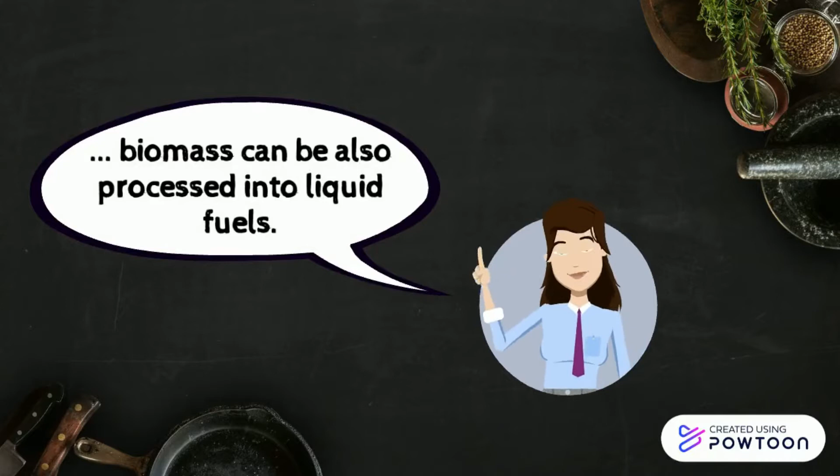Actually, biomass can be used as a direct substitute for fossil fuel, and biomass can also be processed into liquid fuels such as oil and alcohol. Besides, biogas generated at dumping sites and during the fermentation process of various organic sludge can also be used as an energy source.

In this study, researchers highlighted that the sludge from municipal sewage treatment plants can be a substitute fuel, in which, by utilizing this waste, compost may be produced and processed into valuable fuel, such as briquettes. Briquettes have the same weight as brown coal, and combustion of briquettes can even be achieved with lower air pollution.

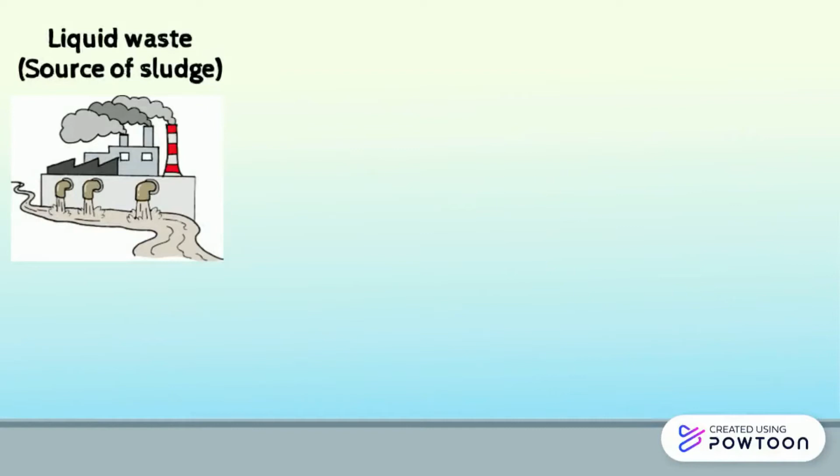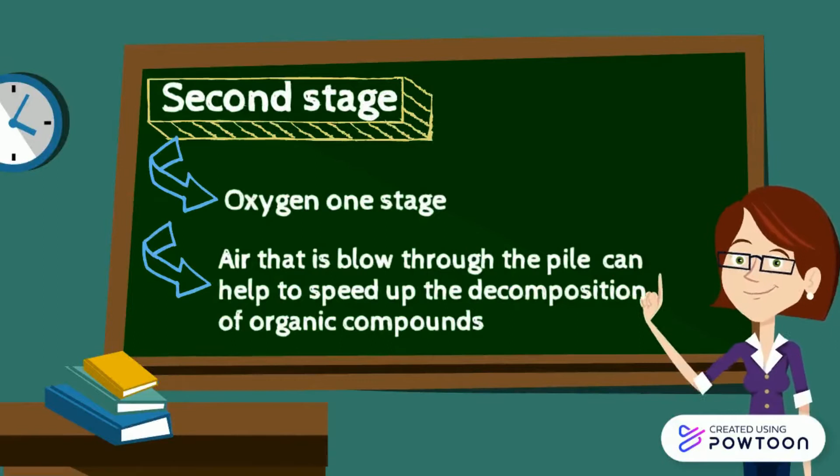The second stage is the oxygen stage. The air blown through the pile helps to speed up organic compound decomposition. The third stage is the briquetting process. Briquetting is the granulation and addition of artificial additives to obtain some kind of fertilizer. The end product is a substitute fuel with a calorific value of over 10 megajoules per kilogram.

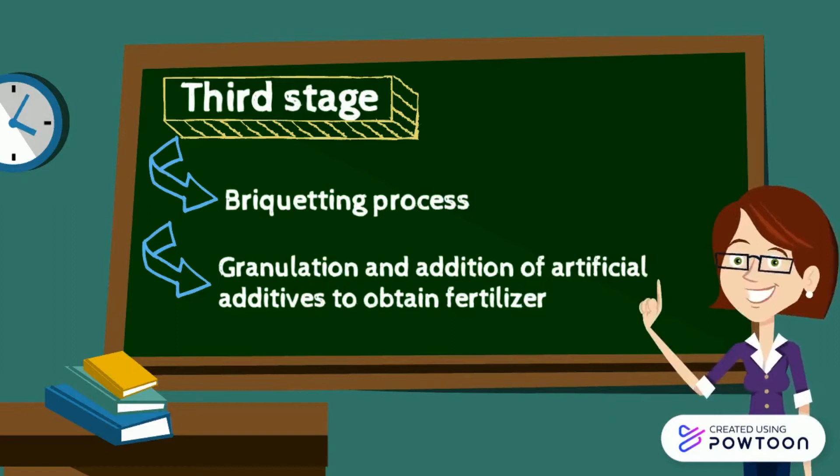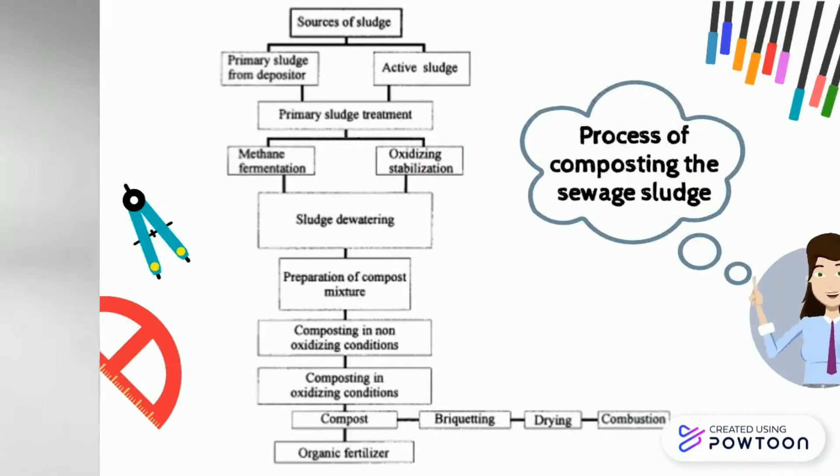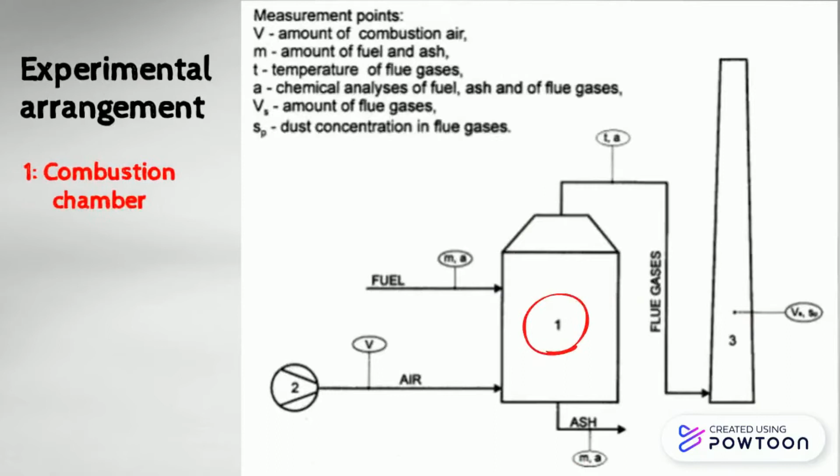The following chart shows the process of composting the sewage sludge in order to produce the organic fertilizer. Next is the experimental arrangement of the furnace equipped with apparatus for the combustion process, and the apparatus shown includes the combustion chamber, exhaust, and chimney. The following table shows the average composition of the briquettes, such as carbon, hydrogen, sulfur, oxygen, and so on.

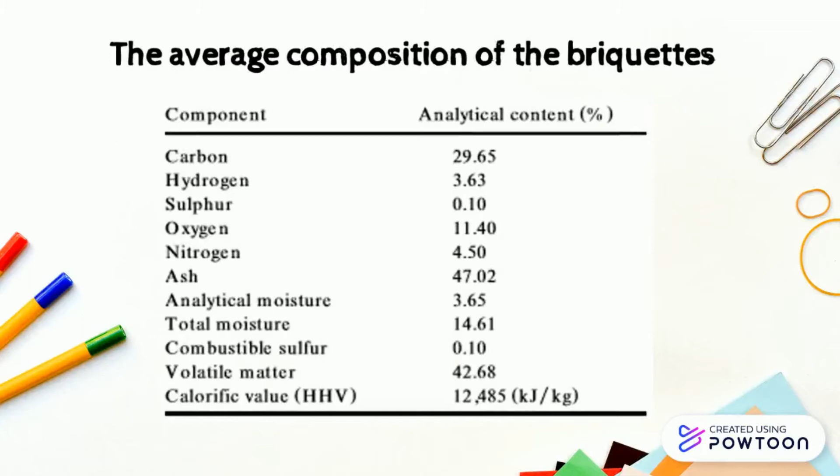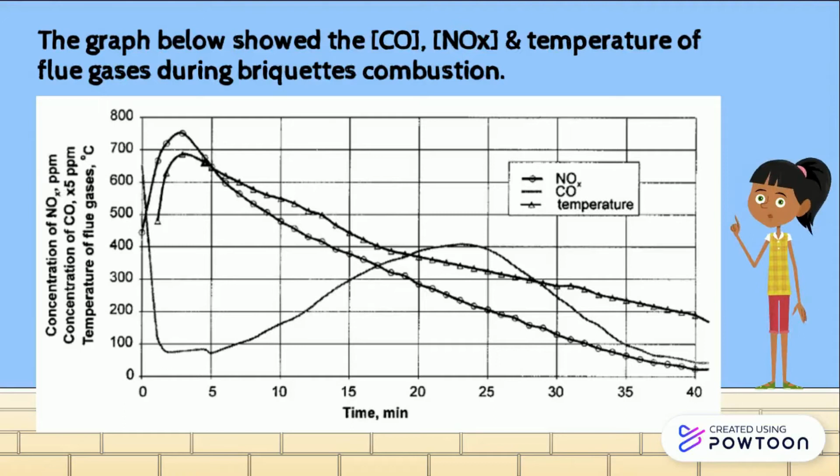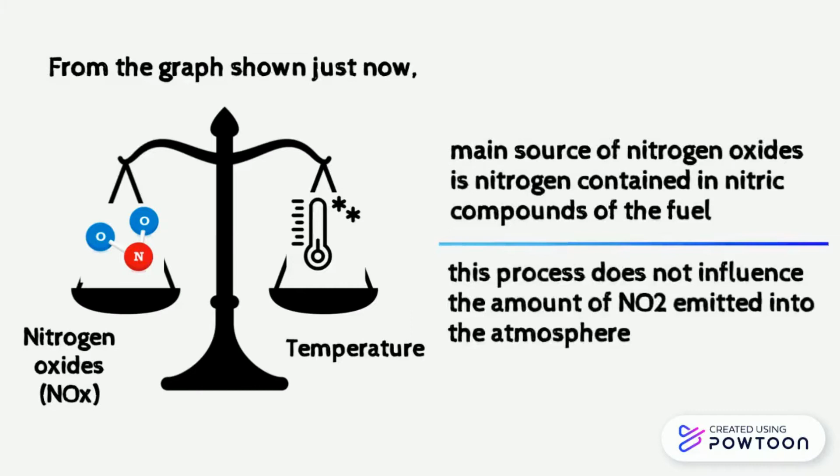So let us move into the result and discussion part. The graph below shows the concentration of carbon monoxide, nitrogen oxides, and temperature of flue gases during briquette combustion. Based on the graph, comparison between the nitrogen oxide and temperature reveals that the main source of nitrogen oxide is the nitrogen content in the nitric compounds of the fuel, and this process will not influence the amount of nitrogen dioxide emitted into the atmosphere.

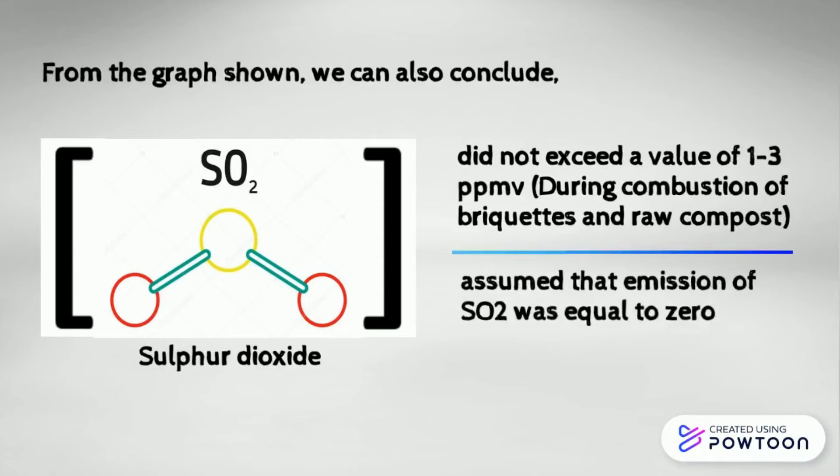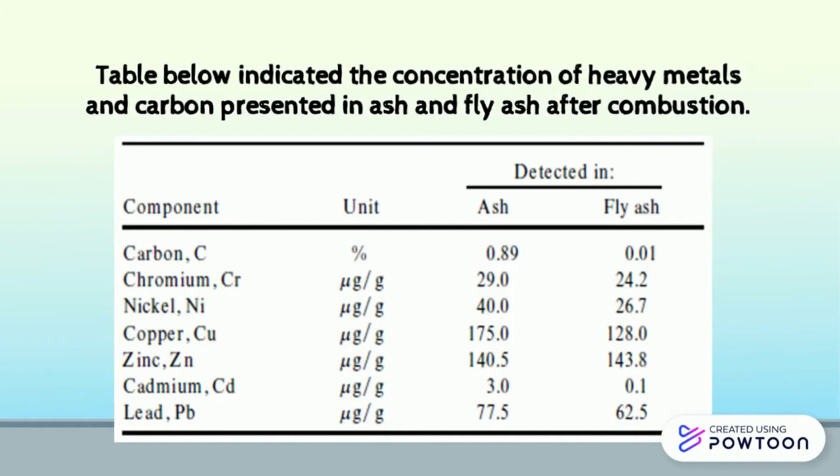From the graph shown, we can also conclude the concentration of sulfur dioxide did not exceed a value of 1 to 3 parts per million by volume during combustion of briquettes and raw compost, and we assume that the emission of sulfur dioxide was equal to 0. The table below indicates the concentration of heavy metals and carbon present in ash and fly ash after combustion. We can conclude that heavy metal concentration in the compost is relatively low.

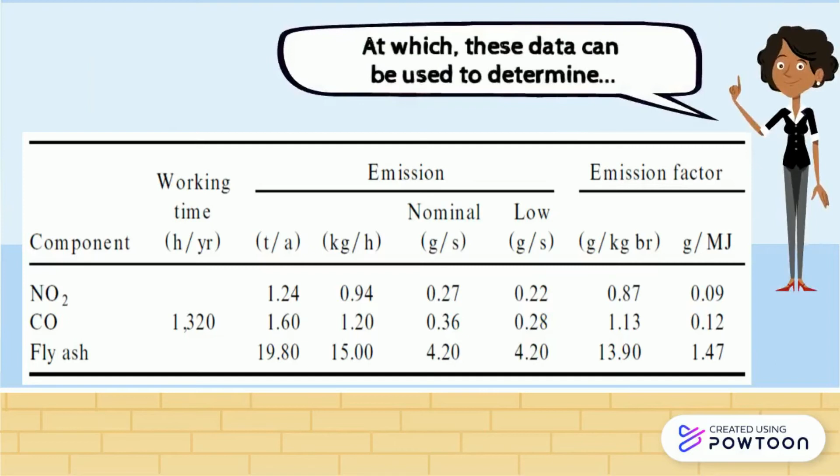So next, the table below shows the emissions of components such as nitrogen dioxide, carbon monoxide and fly ash into the atmosphere. These data are important because they can be used to determine pollutant propagation in the atmosphere. So let us move into the conclusion part. In conclusion, both objectives were achieved successfully: the waste-to-energy process was interconnected and performed successfully, and the substitute fuel was produced successfully through composting and briquetting.

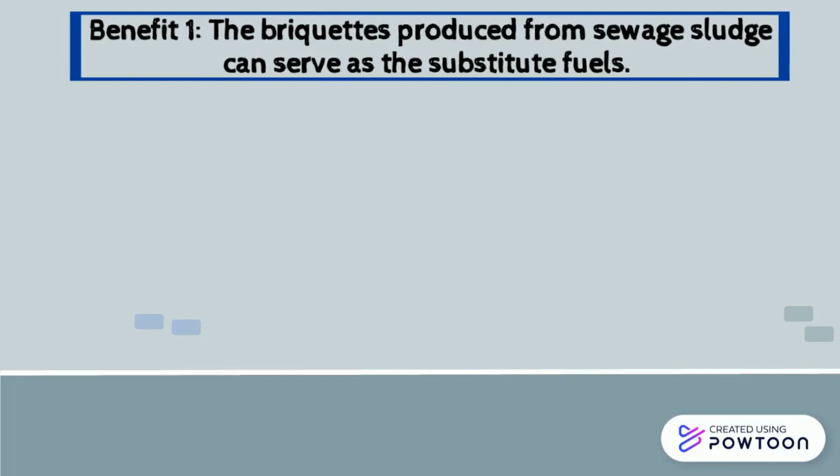So for the final part, reflection. Let us start with the benefits. The first benefit that can be deduced from this research is that the briquettes produced from sewage sludge can serve as a substitute fuel because the combustion and thermal conditions of the briquettes and brown coal are the same.

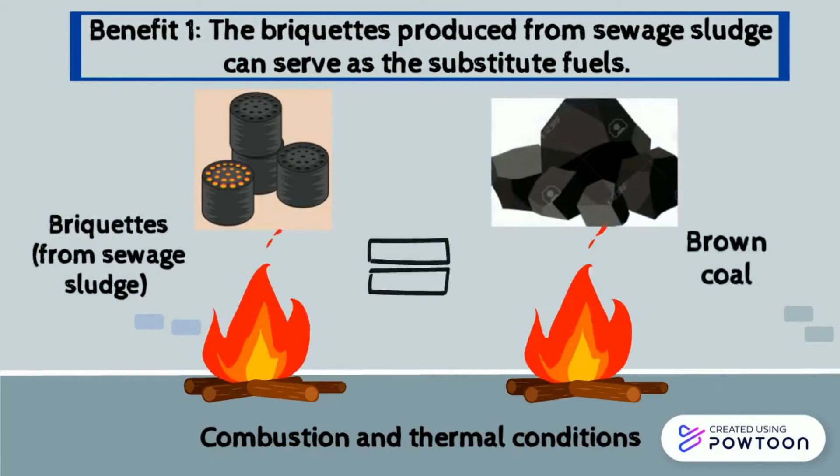So next, the second benefit is that briquette combustion is environmentally friendly because briquettes burn with zero sulfur dioxide emission due to low sulfur content. Besides, briquettes also burn safely within the emission restrictions due to low concentration of heavy metals. Furthermore, briquette combustion is considered clean burning because it causes lower air pollution.

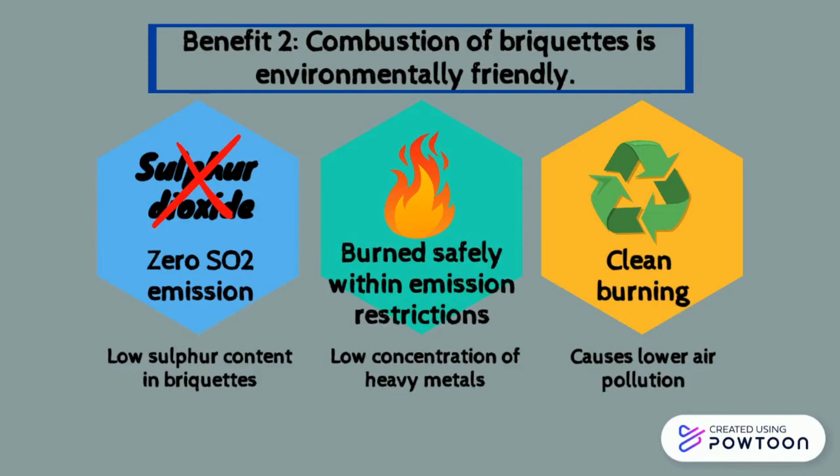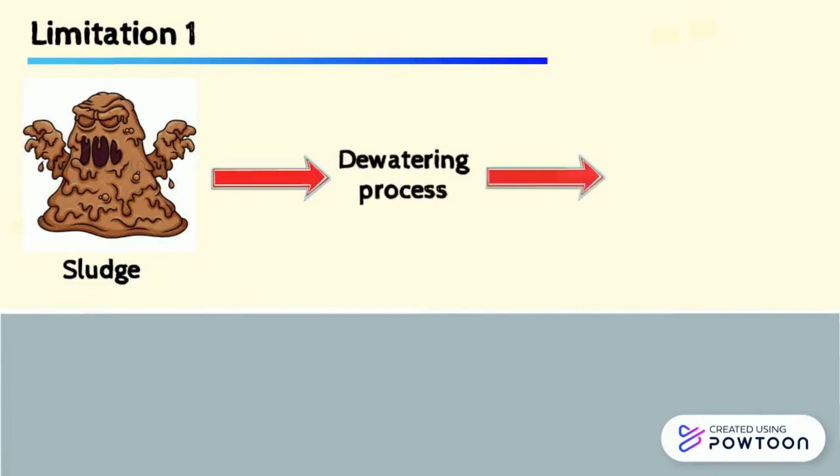Next, the limitation part. The first limitation is that sludge contains high moisture content, thus the sludge needs to undergo a dewatering process before it can be converted into compost. Besides, the second limitation in this research is that the cost of ash disposal is relatively high.